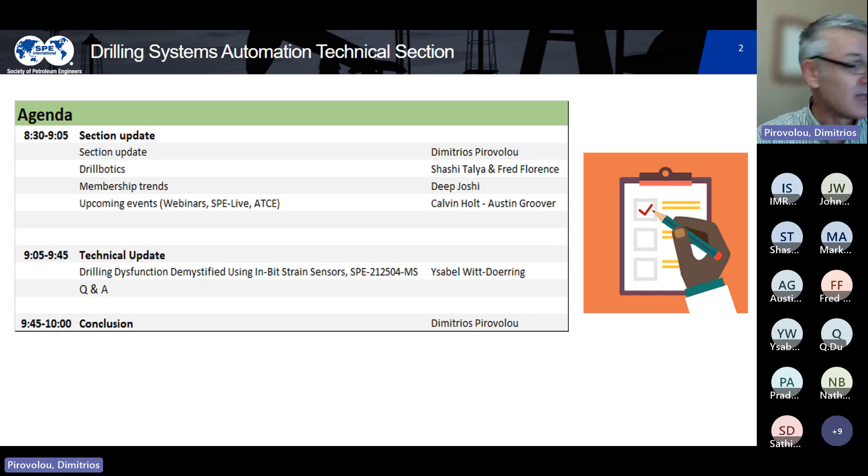As we have discussed in the past, one of the opportunities for us is to try to attract students from disciplines other than traditional petroleum engineering or electrical, mechanical - people like IT, machine learning, operation research, other fields that are more universal, that can have an application in the energy sector. As technology advances and changes and new energy domains come in, I think we can approach those students. That's something that is an ever-present topic. It is not going to go away from month to month.

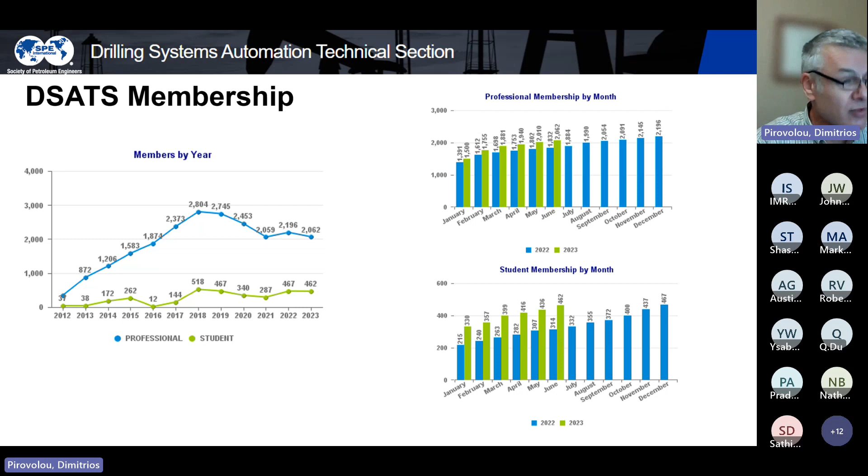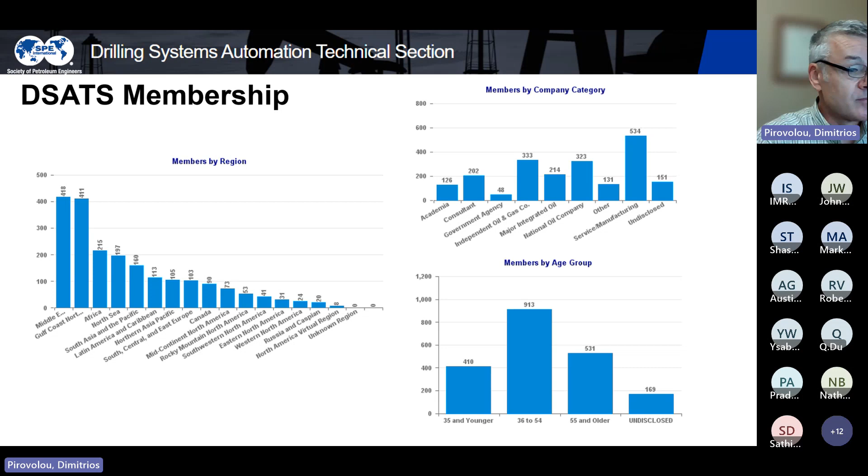Now, since March, as DSATS, we have a bit better representation in all areas, in South America and Asia. So I think it's work in progress, but we can look forward to having some new members from those areas. On the company category, service always has been the biggest group in DSATS, but there are some good numbers from operators, both independents and national companies. And the one we need to keep working with is contractors, working closely with IADC and ART, and that's also work in progress. Okay, so no need to spend too much time here.

The next slide, I have a one slide update for the work going on in DWIS. As most of you are familiar with, we have 4 work streams there, working individuals basically from the industry, working in a parallel approach on how to promote interoperability - in other words, plug and play capabilities for software or hardware that will enable efficiency and reduce costs and improve performance of automated drilling systems.

And plug and play means you have a software, an advisor or something from one company that you are able to seamlessly plug into someone else's rig, without breaking things, without having to spend 2 weeks testing, commissioning, etc. So that's the general picture.

The groups have been working on this for a couple of years now, and there has been some tangible progress individually. So all this is coming together now, and there is a demo scheduled for September 19th at Norce. Eric and Benoit and the group over there are using the Open Lab simulator that they have, and on top of it, they're going to try to combine different modules from the different groups.

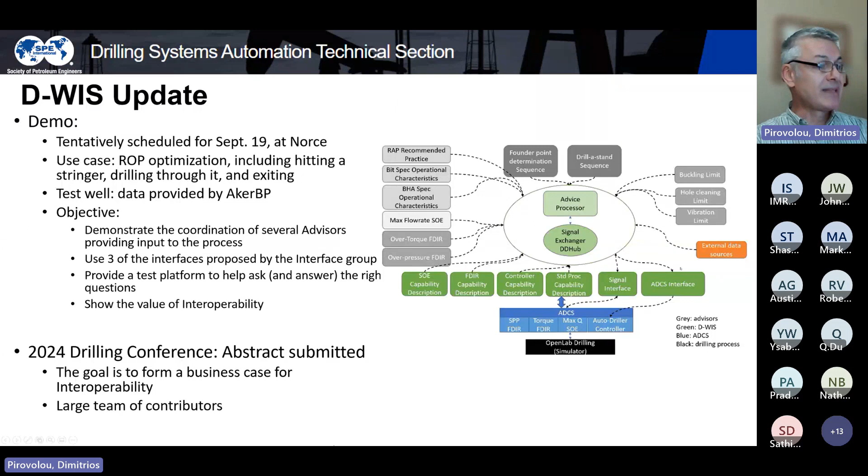The deadline was extended, and we managed to meet that deadline. So that abstract was submitted, and now we're going to work to put together a proper paper. Like I said, we're trying to have people from operators, contractors, service, independent contributors, consulting, academia - everyone that has been working on DWIS is welcome to participate and contribute. I think this is going to be a milestone for this effort, to create more awareness and bring more people in. So that's what I had for DWIS.

The next section is the Drillbotics competition that was completed last week. It's the end of the annual cycle. I think we have both Shashi and Fred here. Maybe, guys, you can take over here for a few minutes and give the latest update, the results. Yeah, Fred, you want to go ahead?

Okay, we had our Group A contest and Group B contest, and the virtual rig winner was the University of Stavanger. They chose an option to drill using the Norce simulator and to detect and control a kick. The physical rig winner was Clausthal University of Technology, directional drilling through actual rock. They've created their own RSS and were able to drill. They had some problems, but at least they were successful.

But what we've decided to do is have the two teams join together and co-author a paper to present in Galveston next year. And that's a bit of a difference. What we're seeing is the work with DWIS, the work with Drillbotics, the work with DSATS - we're looking at the integration of applications with control systems. What we see here is a first step for Drillbotics, and to push that forward in the future to try to continue to build on that.

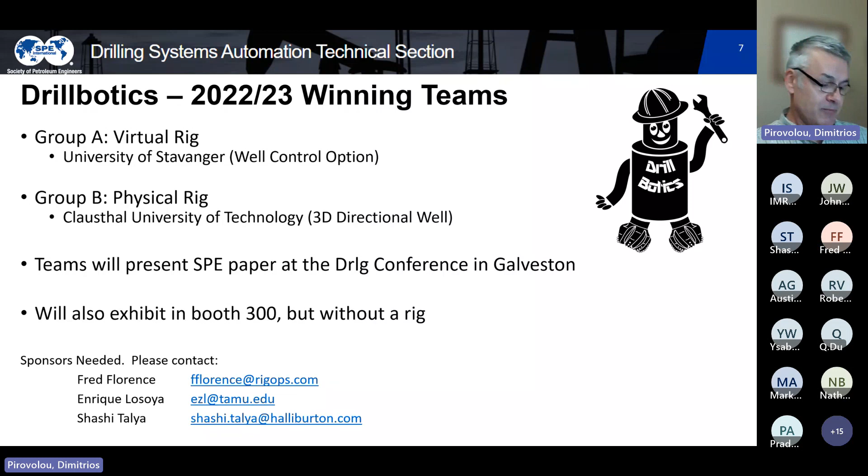Okay, thank you, Robert. So moving to the next topic, this is an initiative that is not yet a formal activity. We discussed this in the last call as well. The top level view is that there is enough interest on the technical side to make sure that any developments, technical developments we do on drilling systems automation, we don't ignore the human factors aspects, how the technology, how the applications will interact with people, and how we make sure that there is always situational awareness, that the workflow is smooth, that we don't disrupt the current processes, that we don't overload the people, etc. So this has been in the forefront of the discussion for years, but nothing really formal to look into this problem or this challenge.

And we have tried different avenues how to produce something material for this, how to work with people that already are working on this, ergonomic societies, human factors. Every individual company has something along those lines, but there is nothing coordinated. So the latest effort is that we're going to work closely with IADC and the ART group and try to push this forward under the IADC umbrella. Why? Because the contractors will be a key factor in this effort. And that's where it stands, essentially.

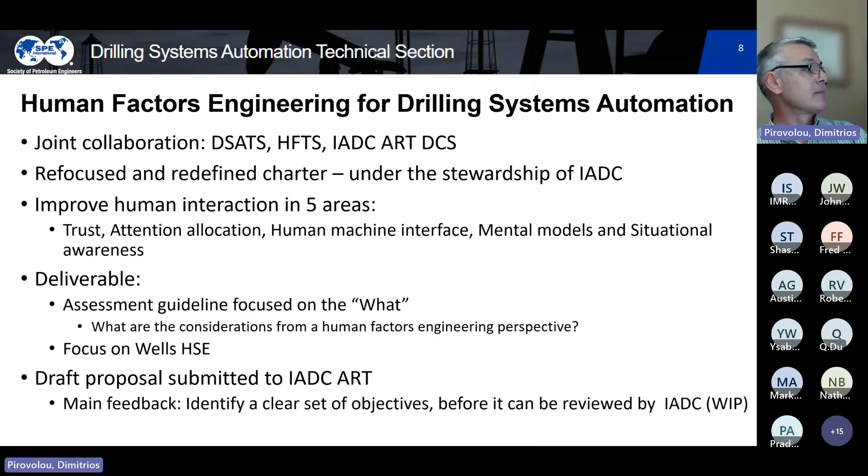All right, next topic is the list of events we have coming up. Events means SPE Lives, webinars, and the ATCE reception. I have a separate slide for that. I think Austin is here also to give some more details.

So these are the dates we've been assigned by SPE. We have an SPE Live at the end of August, and it's open. We don't have a topic for that session right now. We do have a topic for the next webinar, September 21st.

Serafima with Exebenus in Norway gave a presentation this year in a workshop held in Kuala Lumpur on automation, and she kindly offered to give that presentation again in this webinar for the broader DSATS community and others. So that's the topic there.

I think it's going to be an interesting discussion. Everybody's talking about AI these days, so let's see what Serafima has to say and how this has been used and applied in our field. We have one more webinar for November, which is also open. If anyone here has a success story or development they'd like to share, please get in touch and we can try to fill those two spots.

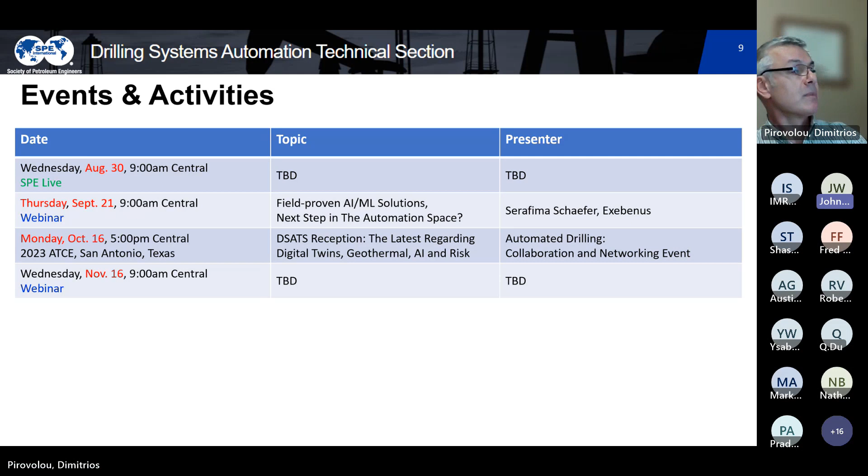So for the reception in October, I think Austin is here. Yes, can you hear me okay? Yes, Austin, please go ahead. I have the slide on.

Okay, thank you. Yeah, so very much looking forward to this networking event. For those who haven't heard or weren't part of the last call, the format is going to be small discussion groups led by various industry experts. So far we have 12 identified candidates who have agreed to be one of our experts. I think we have very good representation.

Over the next couple of weeks, hopefully we'll start a marketing campaign where each of these individuals will be posting about the event and trying to gather some interest in attendance. But it'll be a really good opportunity for some of our younger members becoming more involved in automation or AI, geothermal, to meet some people leading in these spaces.

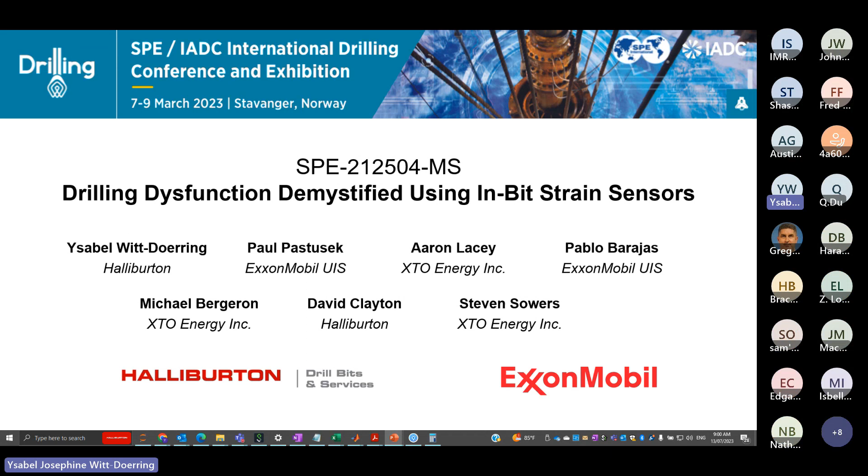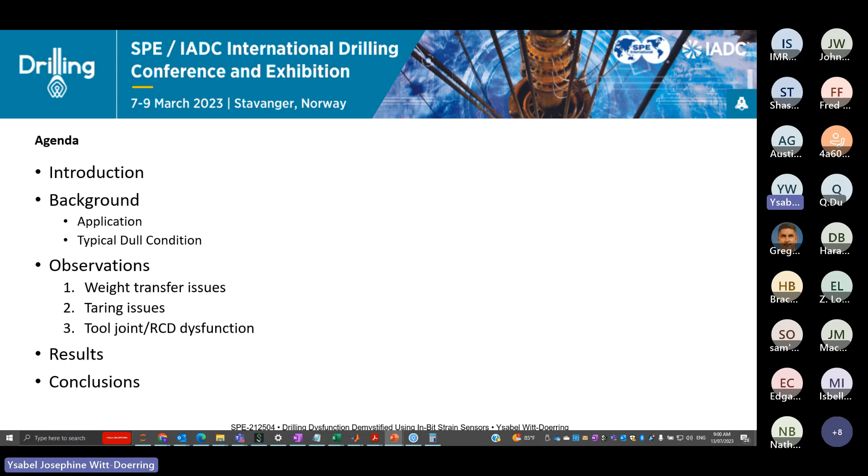But essentially what we're going to talk about is an introduction - what we were doing, what the application was, and the observations we got from doing this data analytics work, followed by the results and the conclusions.

So essentially what we did, I think we did 9 runs in this application for XTO, and we ran a downhole sensor inside the drill bit. This sensor can measure not only vibration, but downhole torque, downhole bending, and downhole weight. The goal of this study was to work out what was going on downhole and how we could engineer those problems away.

The data itself is recorded at 1024, so you've got 1,000 data points per second - really, really high resolution, which is fantastic, so you can get a really good idea. We can see the HFTO, the lateral vibration, the stick slip, we can see everything. Usually we take the 1024 data, downsample it to 1 second, and have a look what's going on in that space, and if anything doesn't look right, we'll go back into the high frequency and look at it.

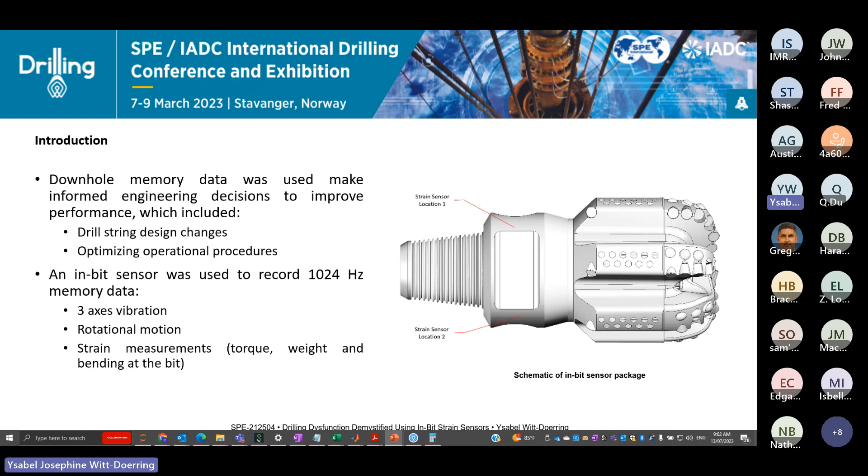So essentially we took this data at the bit to try and work out what the dysfunction was, and then we tried to engineer it away. So the background - what was the problem, where were we drilling, and what were we trying to solve?

Essentially this was an 8 3/4 lateral production hole. On the far right, you can see a stylized trajectory of the well. We're going down close to 17,000 foot TVD, and then out another 10K, so we're talking about measured depths of 25,000 to 27,000 foot - really, really out there.

The target zone was this really thick, hard, abrasive shale with interbedded chert, as well as pyrite. Anyone involved in bit forensics or drill bit damage will know that chert and pyrite are not friends of PDCs - they will destroy cutters very quickly. This shale, and I use the term loosely, was very abrasive with very high quartz content, so we were getting a lot of premature PDC failure because we were destroying the cutters in the chert and the pyrite.

We're destroying the shoulder cutters in this abrasive shale, and so we were really having troubles with the run lengths. I think on average, some of the wells were doing 200, 300 foot runs, and then we were having to come out of the hole to change BHAs. When you're really out there at almost 25,000 foot, to do a round trip, that's a lot of tripping time.

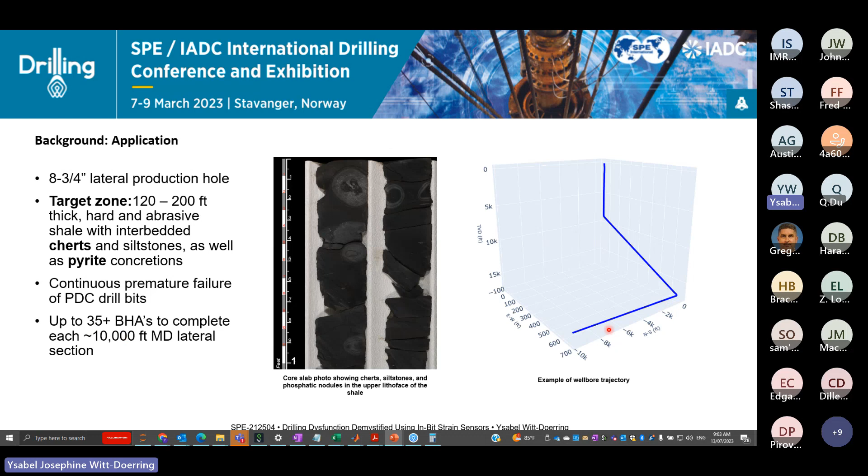So can we improve this runtime? What's going on from a dysfunction standpoint? Can we mitigate that, and can we improve the run life? And we did improve the run life. Like we can see here, it was taking close to 35 BHAs to complete this lateral. So anything was an improvement from 35, and that's what we were trying to achieve.

Going back to this dull condition, this is a typical dull condition from the application. You can see there was a lot of thermal damage, the thermal degradation of the diamond table, a lot of chipping, a little bit of tangential fractures. You can see these tangential fractures. It doesn't look like a lot of damage, but when you're in these really hard shales, close to 35,000 PSI rock, it really is not your friend. As soon as we were getting a little bit of dulling of these cutters, we were struggling to continue to drill.

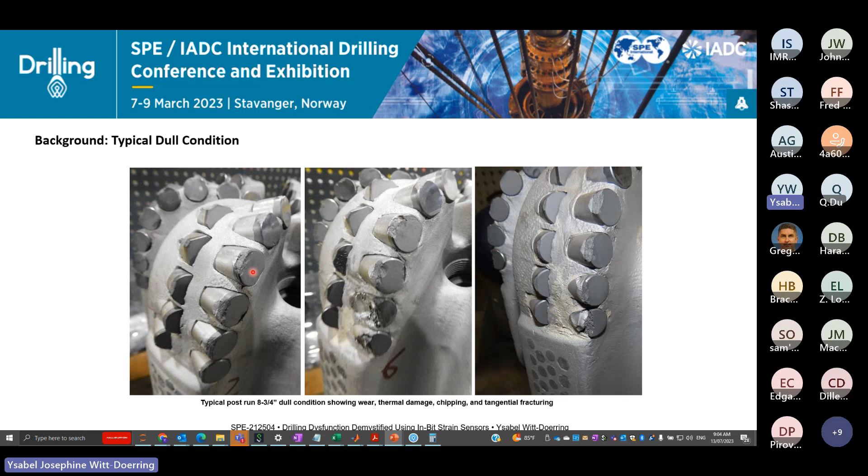So the goal was, how can we improve this dull condition? What did we find out during the study, and how did we use this data to improve the run life? First one, really poor weight transfer due to drill string buckling. So that was the first thing. We had a hypothesis that it was happening, but we were able to prove it with the data.

The second thing was taring issues surrounding weight on bit and differential pressure. This is something we see all the time now that we have these downhole sensors where we can measure downhole weight, downhole torque, and we can see that, hey, on surface we only thought we had 30, but downhole we actually had 40 because we've tared incorrectly or something like that. We see this one all the time, not only in this application, but once you have eyes downhole, it really does help understand why you're seeing some of the damage you see.

And the third one was the loss of ROP due to whirl as the tool joints pass through the rotating heads. All this work was done with rotating heads. Obviously, when you try and push that tool joint through an RCD, you have that momentary drop in downhole weight, and we can see that with the sensor. But what is interesting is when that weight comes back, how that bit and BHA reacts to that, and how we can enter into this dysfunction state.

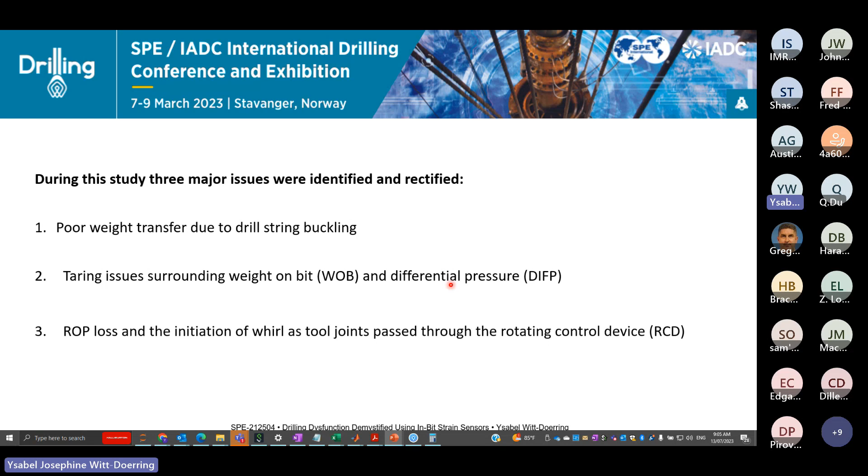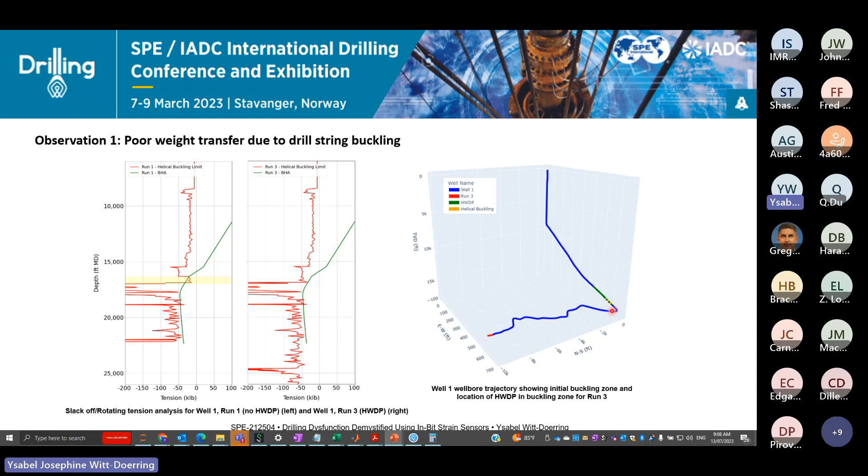And so we did that, and then we looked at the results. There were a few steps we had to go through before we got there. This was the data I showed you guys originally—this was the first run in that well, and like I said, we had that buckling. This was a motor-assisted rotary steerable.

We had the great idea for our second run in that application: let's just run a rotary steerable without a motor and see what happens. Maybe if I increase my surface RPM—because with a plain rotary steerable you've got to up your surface RPM to get some of that rotation downhole—let's see if we can get rid of the motor and reduce the actual revolutions being done by the bit. Maybe this will reduce some of the wear we're seeing on the cutting structure.

That was obviously not the case. We got ourselves into a situation of severe stick slip. You can see our indicator is from 0 to 200, and we were essentially in severe stick slip because of that loss of rotation at the actual drill bit. So that was not the solution.

But interestingly, with that increased surface RPM, we seem to have been able to shift the point at which we were seeing that buckling, and get a little better weight transfer. But by the third run, we went back to the motor-assisted rotary steerable.

We said, yes, that's the way to go, and let's put that heavyweight drill pipe in that section I mentioned. Once we had that heavyweight drill pipe in there and ran it through that region where we thought the buckling was happening, you can see how all that data has shifted from down here into this section here.

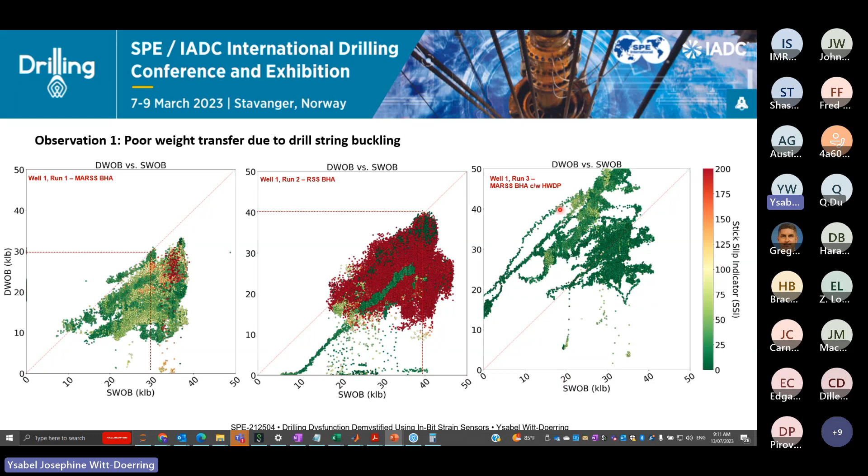So this data here, what is going on? I've got 20,000 on surface, but downhole I've got close to 40,000. What have we done here and why is this happening?

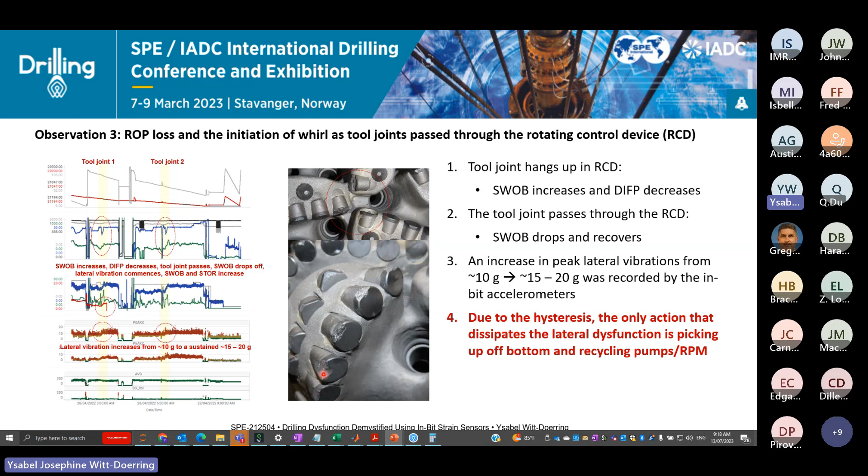At the same time, lateral vibrations will damage the outside of your cutters as it goes back and forth and interacts with the wellbore, especially in that hard formation. So what we were seeing was just if we sit there, hang up, and lose that downhole depth of cut, we get ourselves in a really bad situation.

So how do we fix this and what can we do? I know a lot of companies have been looking at this sort of stuff, but the goal is to maintain that constant depth of cut. You don't want to lose that engagement of the bit and the formation.

Because when you lose that depth of cut and then re-engage, that friction on the outside of the drill bit pushes it and makes it want to rotate off center, changing the center of rotation as it interacts with the borehole. So the goal is, can we maintain a constant depth of cut downhole, and how do we do that?

So essentially what we thought about doing was finding out what is the surface weight we need to actually push that tool joint through the rotating head effectively without losing weight downhole.

And so what this meant was, we would engage ROP control, look at the ROP just before we're hitting that point where the tool joint's going through the RCD, and we would set that as our ROP control point.

And so as a result, if I'm in ROP control, my auto driller is going to continually try and increase the weight to maintain that ROP control until obviously it pushes through.

At the same time, you need to have your surface limit on your auto driller set, your surface weight limit set to a value that's going to allow it to maintain effectively this constant ROP and that constant feed of line off the drum.

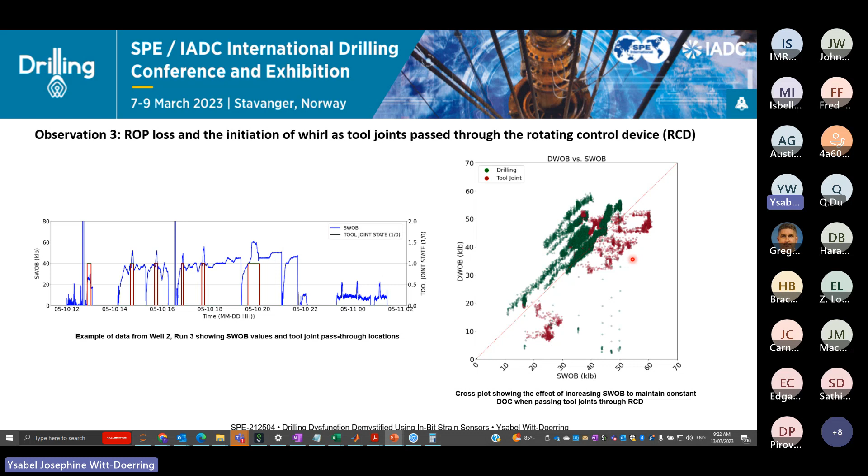if I was to look at this data in a vacuum without understanding what's going on here, I would think, oh, I've got some crappy weight transfer. But it's good to remember when you make these cross plots, you need to understand what is happening in your surface systems, what you've introduced, because this will affect your data quality. This is something I talk about a lot. Just keep that in mind when looking at cross plots and understanding different relationships. You might have introduced the problem and it might not actually be happening.

So what were the results? I know I've spoken about a lot of different things and gone back and forth, but these were the actual results. On the y-axis is duration in minutes. The column chart is colored for the amount of time I spent for that stand in lateral vibration above 6 Gs, and the amount of time I spent in a stick slip state above 75%.

These are the same runs I showed you on the cross plots at the start. The first run was the motor assisted rotary steerable, the second was the rotary steerable, and the last one was the motor assisted rotary steerable with the heavy weight in the buckling zone. On that first run, you can see when I had that poor weight transfer - the blue here is my downhole weight.

You can see when I have that poor weight transfer, and as I damage my bit, lateral vibration is increasing. You can see that downhole weight is sort of hovering between, I think, like 20 and 30.

The second run, I'm not even going to spend much time on. Obviously that stick slip was out of control, it was just a total disaster. But hey, we tried something different. If you do the same thing over and over again, you're never going to get a different result. So we tried something different, did not work.

Third run, we learned our lesson. We went back to the motor assisted rotary steerable, but put that heavy weight in the buckling zone. When we put that heavy weight in the buckling zone and improved that weight transfer, you can see my downhole weight is now in those 30s to 40s. What I've also done by improving that downhole weight is improve my engagement of my bit with my formation - I have better depth of cut.

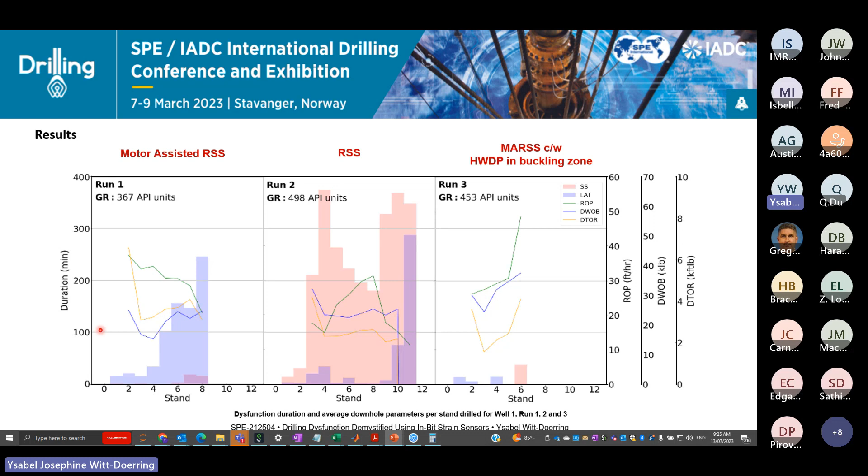In general, running heavyweight drill pipe through a buckling zone is just not practical moving forward. What they'd wanted to do for a long time was replace the 5.5-inch drill pipe with 5 7/8 inch, bigger, stauncher drill pipe. Critical buckling loads are increasing, and it's better for torsional dysfunction as well. The data gave us the permission, so to speak, to justify changing a drill string, because buying an entire new drill string isn't cheap, and changing all your handling equipment isn't cheap either. It's not something you do lightly, but the data supported it.

So we did it. There were also other engineering changes, including some changes to the well trajectory to reduce its tendency to want to buckle. And there were more stringent operating procedures to address the issues we were getting with the crappy taring, that tool joint dysfunction. Really communicating clearly with the field personnel about what's happening and what the result is. We have to be really stringent on when we re-zero, understanding the situations and when you need to do that.

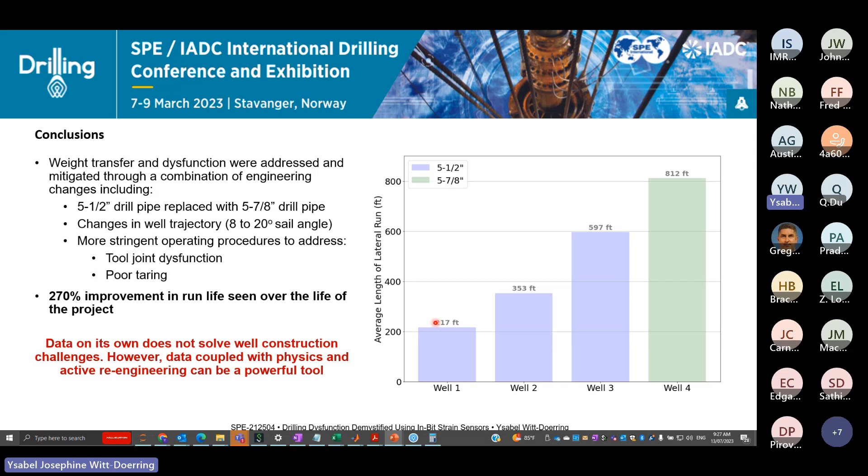Pablo, I'm not sure if he's still on the call, but he'll be able to fill us in on where they are now. I know they've set some real record wells in this region compared to when they first started, and we were in that sort of scenario. So thanks for your time, hopefully that was interesting, sorry if you'd already heard it. If you have any questions, just let me know and I'd be happy to answer them.

Is Pablo on the call, or can we open it up for questions? Go ahead, Pablo, any comments?

Yeah, this is Pablo, I'm sitting here in Argentina right now. We're getting ready to drill 2 wells, and this is kind of a breakthrough on how we look at rig control systems. We're presenting a paper at the ATC with the rest of the story. There's approximately another 12 months worth of work with 4 drilling rigs that was initiated by the work led by Ysabel and Paul Pastusek.

The interesting thing is that every well, the run length kept getting better and better. If you look back in late 2021, in the most difficult basin we have right now, it was taking up to 64 BHAs to drill some of these wells. We just took those rigs - they're going to carbon capture now - but on our last pad, we had back-to-back 4 BHA runs in those wells.

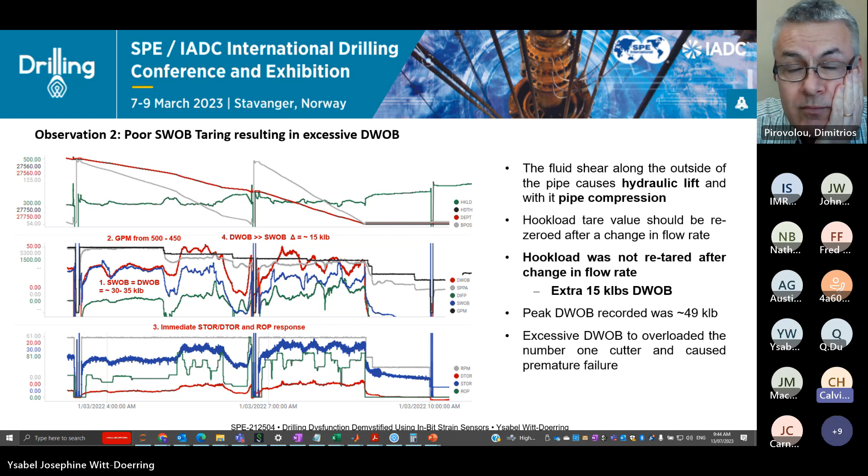I had personal experience trying to get the rig to, they didn't have a procedure. This is 4 or 5 years ago. They didn't even know you really needed to have a constant procedure. So I'm all for standardization there, because it's data quality.

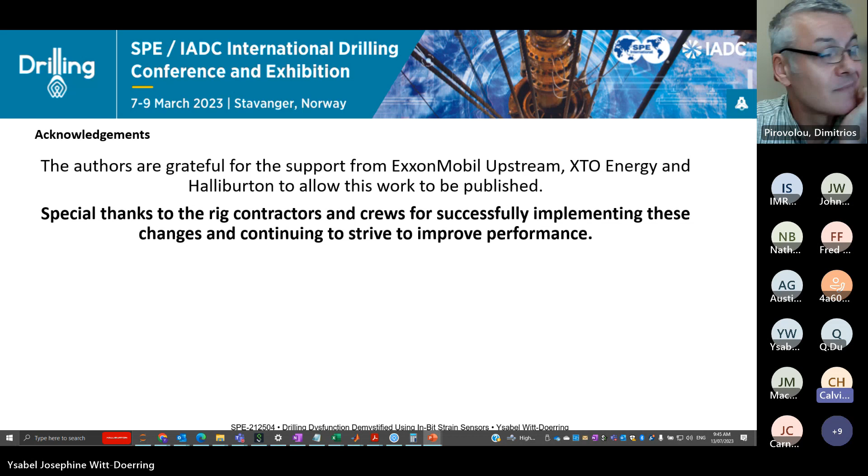I had a question with respect, Ysabel, but did you assume the hole diameter is constant? Would there be any implications for washout zones or overgauge hole sections for some of this work? In terms of lateral vibration, or where are we going?

Just in general, the results. I guess from a modeling perspective is probably what I'm thinking of - is if there was an implication there, what normal would be. You make some assumptions on the hole geometry.

Yeah, and so sometimes when it comes to hole geometry and lateral vibration, it's like which came first, the chicken or the egg, right? You've got an overgauge hole, so your tendency to whirl increases, but then if you're whirling, then you're going to create an oversized hole. And in this case specifically for this work, we didn't look at the caliper logs.

Unfortunately, just being the service company, I don't have access to this data. But I'm not quite sure if Pablo's still on the call, because I know you guys were doing work with 3D calipers and looking at this vibration data. But unfortunately, from my end, we don't get fed that information.

But there definitely 100% is a relationship between those things, and it does affect the dysfunction that we see - this formation itself and its desire to wash out. Pablo, do you have any comments there?

Yeah, it's different if you run a motor or an AutoTrak RSS, or the orbit - the profile. It's not easy to quantify, but yeah, it's a good point.

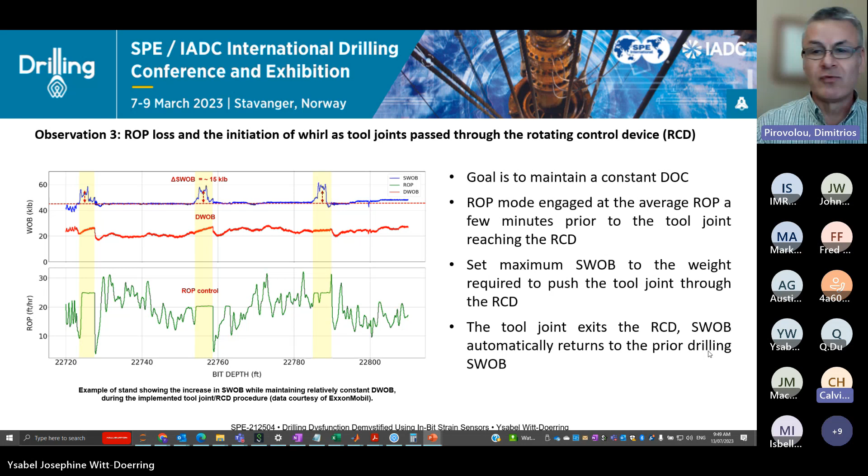So that brings us to the conclusion of the call. Those are the same two slides I have been using, about what we're trying to do in DSATS - to remind everybody the objectives, the goals, and invite participation. Knowledge sharing is one of the main objectives for a technical section, and like today, this was an excellent example.

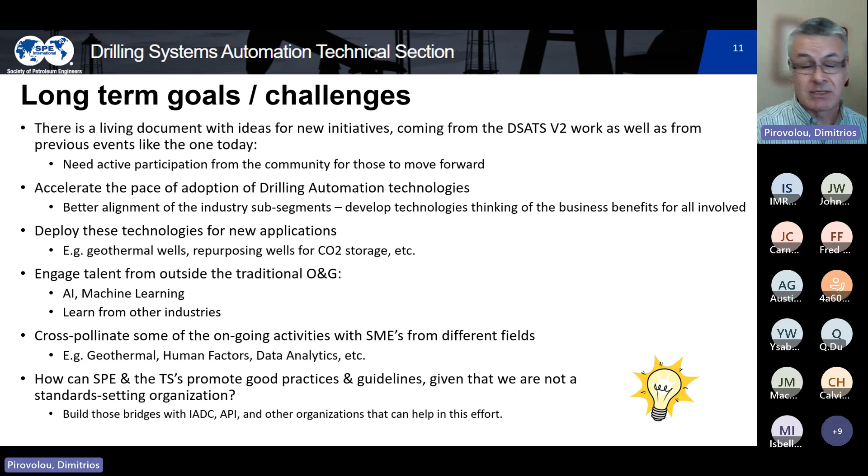Of lessons learned and shared across company barriers. So I'd like to invite others, if you have similar studies or data or technologies that you would like to share with the industry - this is a platform here. These calls and these webinars are a platform to promote this knowledge sharing. This is an open standing invitation for people to participate and share.